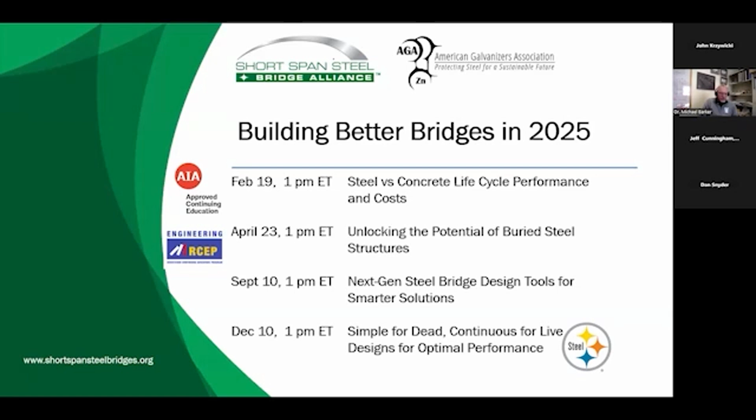Today we're going to talk about steel versus concrete, life cycle performance and costs, as part of Building Better Bridges in 2025. I'm Michael Barker at Wyoming and also the Director of Education for the Short Span Steel Bridge Alliance, which I do want to introduce to you.

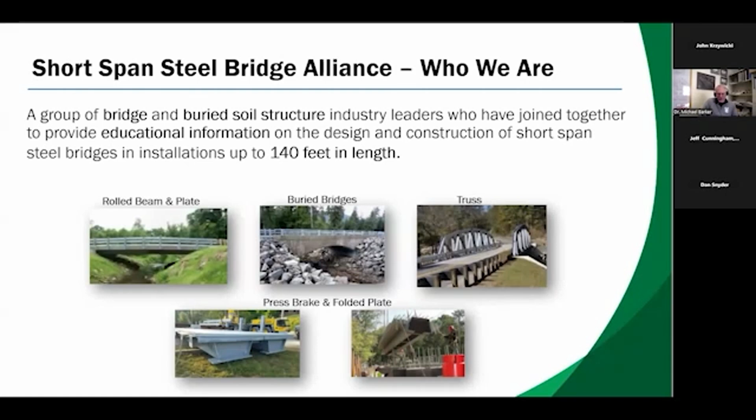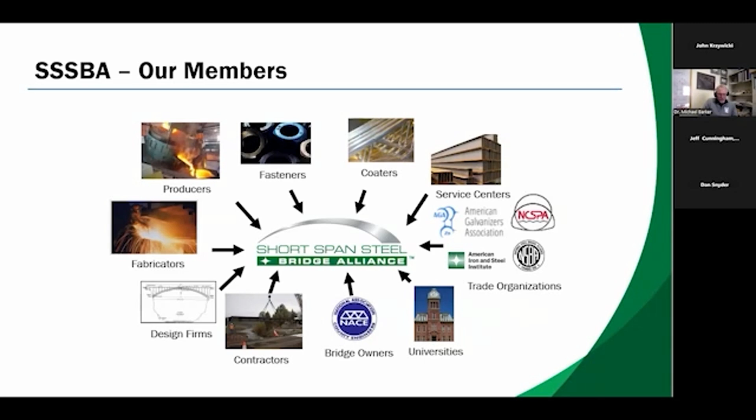The Short Span Steel Bridge Alliance is an industry support alliance, a group of bridge and buried soil structure industry leaders who have joined together to provide educational information on the design and construction of short span steel bridges. It was initiated in 2007 as part of the American Iron and Steel Institute, where the members are stakeholders in the steel bridge industry. The purpose of the alliance is to help owners and design engineers with designing and building short span steel bridges. This is a list of what we do.

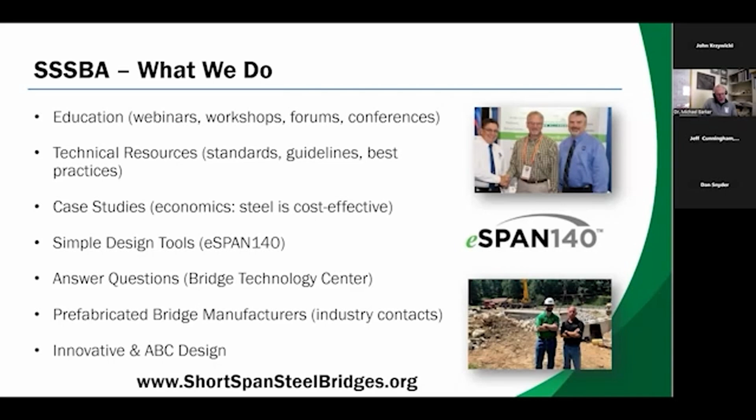The alliance is involved with all aspects of short span steel bridge design and construction, including outreach and education. An example of that is this collaboration with the AGA with the four presentations in the Building Better Bridges in 2025 series. We provide resources on all aspects of steel bridges, sample case studies, and a simple design tool called eSPAN140, which allows the user to get a design for a steel bridge in a matter of just minutes. And of course, a technology center for questions. We are also into innovative and accelerated bridge construction solutions and manufacturing firms that can deliver you a bridge. The website is there, and we certainly encourage you to visit it to see all that we offer.

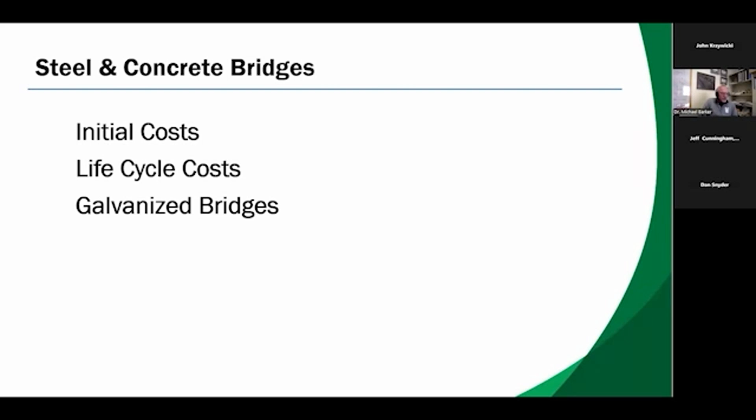For today's presentation, we're going to look at economy and life cycle costs of steel and concrete bridges. We're going to start with the initial costs and move into life cycle costs. This is an AGA presentation, so we're going to talk about life cycle costs of galvanized bridges right at the end. We start with the preconception that concrete bridges are less expensive than steel bridges in the short span market.

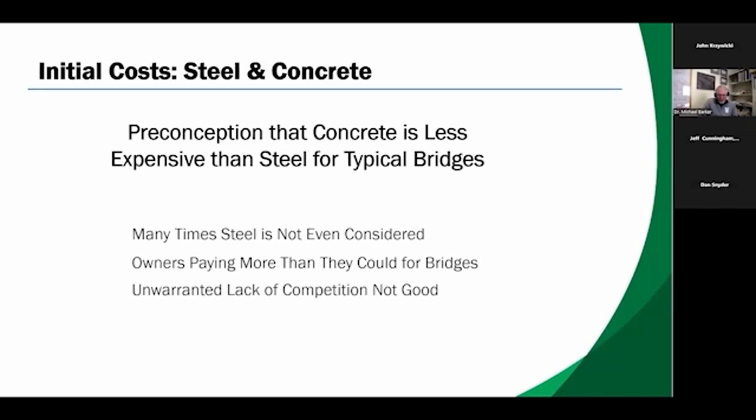Many owners and engineers believe this to be true, and many times steel is not even considered when there is a short span bridge need. This is unfortunate because that means owners may be paying more for their bridges than necessary. If owners and engineers would compete steel and concrete bridges, the cost for both would be lower due to the competition. In fact, studies show that states or regions that do not consider steel alternatives and only build concrete bridges pay more for those concrete bridges than states or regions that have healthy competition between the two bridge materials. Now we're going to look at case studies of county and state bridges for initial costs.

The first case study is kind of special to me because it's where the Short Span Steel Bridge Alliance started. It's from Audrain County, Missouri, and these are bridges that were built in 2012.

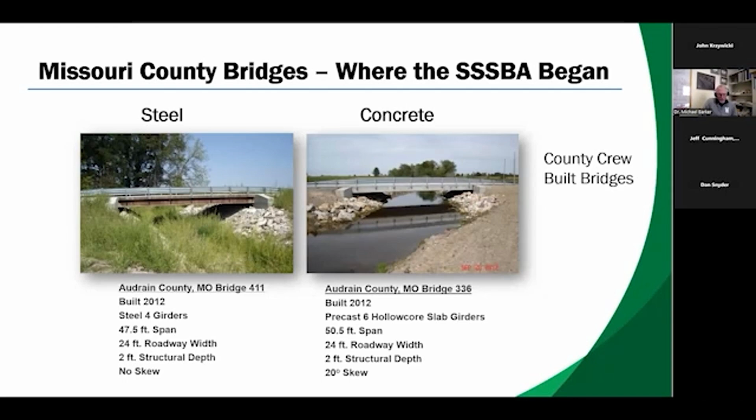This slide shows the total cost for the two bridges, where the costs are broken into material and labor, equipment, bridge rail, rock, and engineering.

We can see that for the total costs of these two bridges, the steel bridge has a 19% savings over the concrete bridge. The costs are calculated based on the square footage because of the slightly longer 3-foot length of the concrete bridge.

However, comparing only total costs can be deceiving given the different site characteristics of the two bridges. For instance, we see here that the concrete bridge had significantly higher engineering costs and lower rock costs.

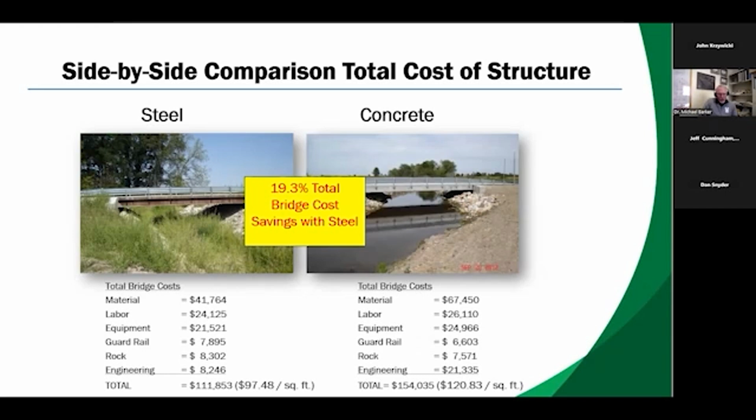So that same county engineer was also asked to separate out only the superstructure costs so that an equivalent direct comparison could be made for the two bridges.

These costs represent the costs associated with only the superstructure. So this is a true apples to apples comparison of the cost of this concrete and this steel bridge. Removed from the total cost is all site prep work and grading, engineering, rock, abutments, and so forth.

We can see the cost for the materials, labor, and equipment for only the superstructure. So if we look at the results, the steel bridge cost $37.54 per square foot and the concrete bridge was $50.61. The steel bridge is considerably less expensive for this comparison.

Now, one item to note is the equipment cost, where the steel bridge used a county-owned 30-ton crane. The concrete bridge girder members are heavy, and the county had to rent a 100-ton crane at a cost of $3,500. The other $500 for each in the equipment was a rented skid steer for incidental work.

However, even if the county needed to rent the 30-ton crane, that would have cost $1,520 at that time. That increases the steel bridge cost to only $38.88, still considerably less than the concrete bridge cost.

The steel girders are weathering steel that requires no painting, and these costs are already included in the cost of the steel girders. However, if the county needed additional corrosion protection and used, for instance, galvanizing, the cost would have been approximately 22 cents per pound of steel, and the steel bridge total cost would still be significantly less than the concrete bridge costs.

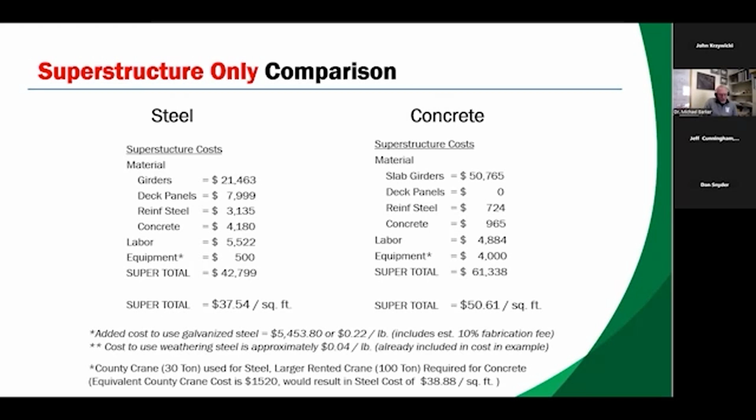So for these two bridges, as they were built, the superstructure-only costs show that the steel bridge option would have a savings of over 25% compared to the concrete bridge. That is 5 steel bridges for the cost of 4 concrete bridges.

This is for 2 almost identical bridges where they have the same structural depth, which means no difference in approaches, the same roadway width, the same bridge rail system, the same abutments, and the same county crew built both bridges.

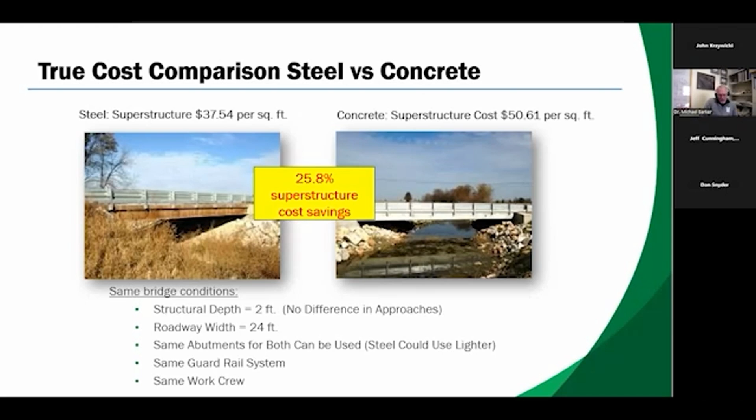Now, this demonstrates that steel is competitive with concrete. In fact, here it is economical. The preconception that concrete is always less expensive is incorrect. Steel short-span bridges can, and many times will be, less expensive than a concrete option.

But everybody says, okay, that was one example. Yes, that's true. The Alliance also worked with the county engineer on other bridges built near the same time frame. This table looks at the total constructed costs of an additional 5 steel and 4 concrete bridges built in Audrain County. At the bottom, we see that sometimes steel is less expensive and sometimes concrete is less expensive. This is healthy competitiveness and is good for the owner and the public.

These are examples of county bridges that show that both steel and concrete are competitive in the short span market, and both should be considered. Now, these examples were county-owned bridges. Next, we're going to look at a couple state bridges in Missouri.

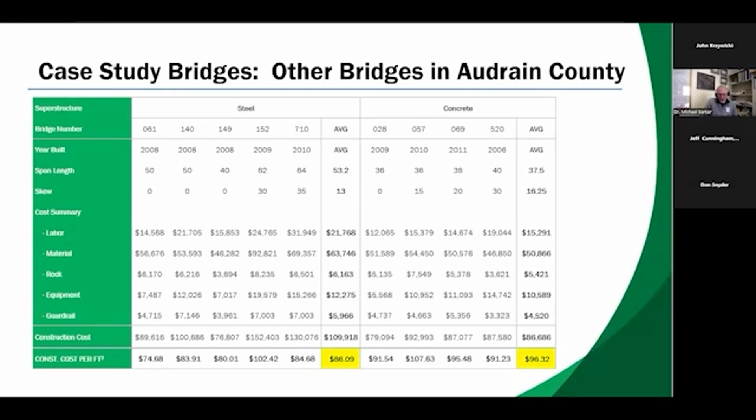Here are two nearly identical bridges, one steel and one concrete, that cross over the same highway near Columbia, Missouri. Both are two-span, with the steel bridge just a little longer and wider, so of course the total cost will be divided by the deck area for comparison. These were both design bid build projects with a contractor constructing the bridges.

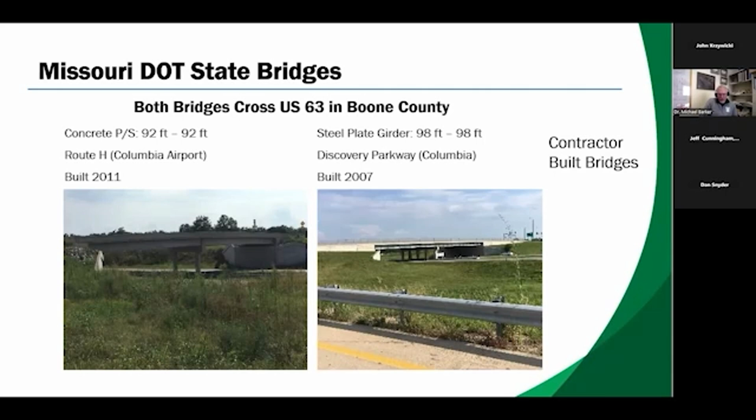Here are the costs for the two bridges, concrete on the left, steel on the right. Both had non-bridge items such as a conduit system, pedestrian fence, and an architectural facade, and these costs, in green, were removed from the total cost since they are not structural. At the bottom, we see the concrete bridge cost $77.71 per square foot, and the steel bridge cost $72.94.

However, there was a 4-year difference between when these two bridges were built. To account for the age difference and inflation, an Engineering News Record construction cost index of 2.7% per year was used to bring the cost of both bridges up to a common year of 2017. We see here that the steel bridge was less cost at $85.58 than the concrete bridge at $91.18.

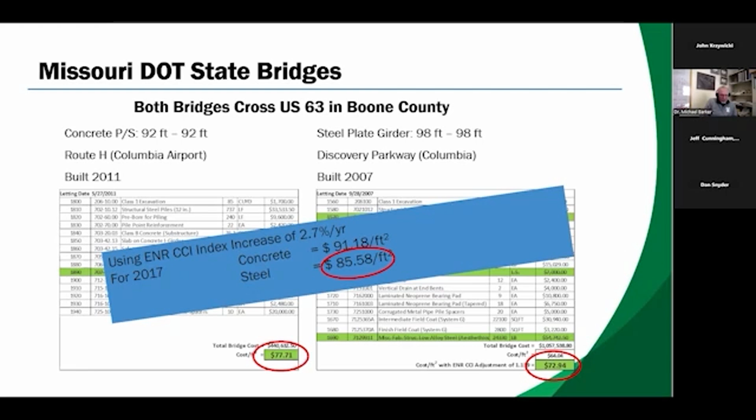The Alliance has so many more case studies on initial cost that you can find on the website, where the Alliance has looked at county and state bridges, bids and actual costs, case studies of county bridges.

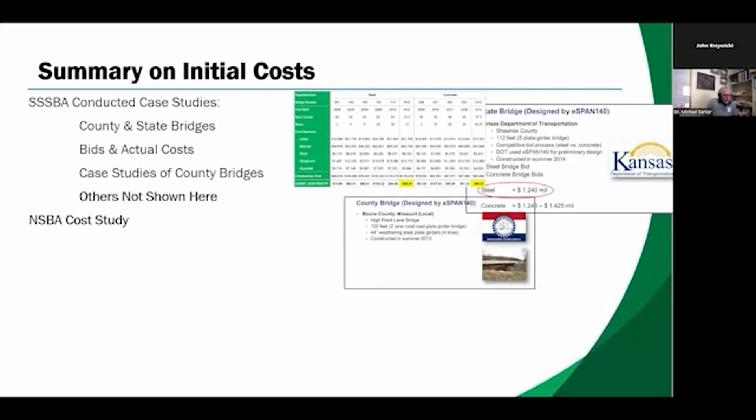After the study was done, the authors offered this quote in the report: 'These conclusions come as a surprise to the authors, who assumed that concrete bridges would be more cost competitive than steel bridges.'

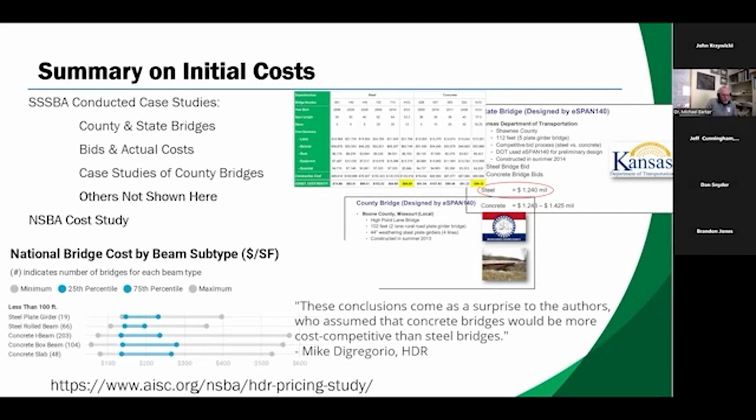So what these studies show, and the NSBA study shows, is that the preconception, which is pretty prevalent across certain regions of our nation, is a misconception. Steel and concrete bridges are competitive.

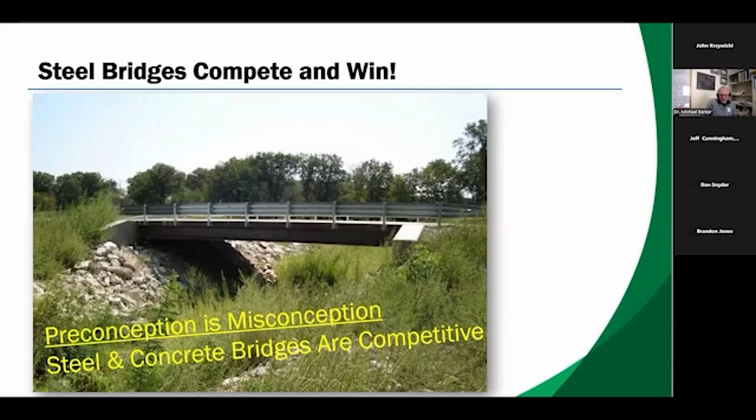But first cost is just that, the cost of putting the bridge in place. Responsible owners are also concerned about future maintenance costs and service life. The question about life cycle costs routinely comes up. What's actually asked is which type of bridge is best for life cycle costs?

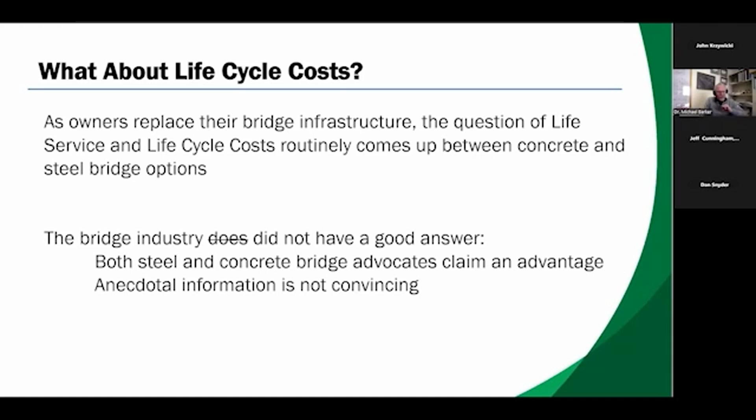Both the steel and concrete industries have offered anecdotal evidence, but did not, until now, have good evidence on which bridge type is best. So a study was conducted that examines the historical life service, meaning performance and maintenance, and agency life cycle costs, meaning the true cost for building and maintaining the bridge over its life, of steel and concrete bridges in Pennsylvania. A historical study was conducted so that the results show what actually happened to the bridges instead of anecdotal guesswork from the steel and concrete industries.

The Pennsylvania DOT had good records on their bridges and offered PennDOT data for the study, and we thank them.

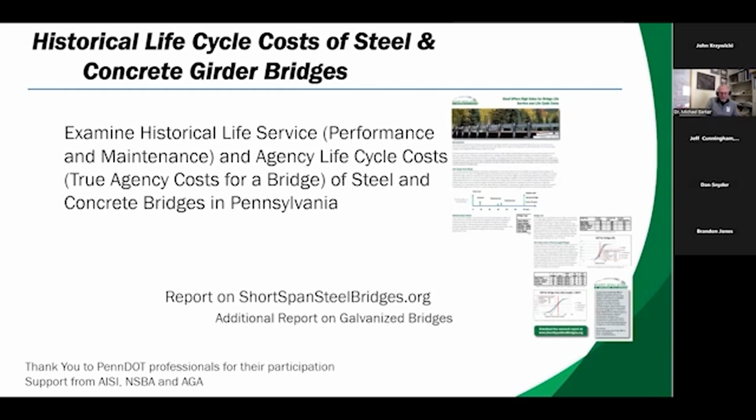To determine a life cycle cost for a bridge, one needs to know the full history of that bridge. This includes the initial cost, the year it was built, and all maintenance that occurred over its life, including department and contractor maintenance, and the lifespan for the bridge or when it will be replaced. Of course, all the bridges in the PennDOT database were still in service, so an end-of-life model was needed to estimate the life of the bridge.

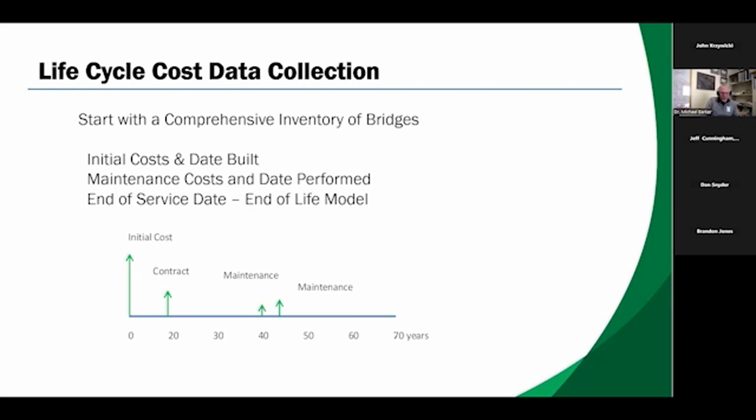The study's objective was to compare life cycle costs of typical concrete and steel bridges, so there were criteria each bridge had to meet to be included. The criteria included considering only typical steel and concrete bridges, selected as precast I-beam, precast box with boxes adjacent to each other, precast boxes spaced apart, steel rolled beam, and steel plate girder bridges. In addition, since precast concrete became a mainstream construction method and modern steel design and detailing started around 1960, bridges built after 1960 were considered.

Each bridge used in the database had to have complete records for initial costs and date built, and accurate dates and costs for any type of department or contractor maintenance.

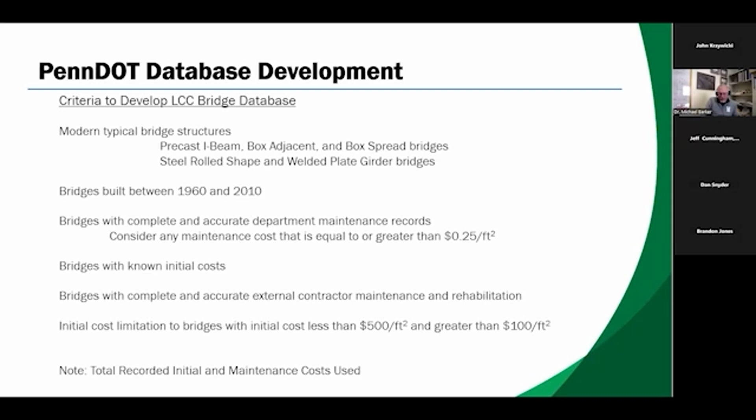Since the study was looking for typical bridges, it removed any bridges that had exceedingly high or low initial costs, and all costs were based on PennDOT recorded costs. PennDOT has over 25,000 bridges in their database. Of those, almost 8,500 are of the 5 types considered in the study, and of those 8,500, over 6,500 were built between 1960 and 2010 for a potential study database.

When the 6,587 bridges were subject to the criteria, many did not have accurate and complete life history information, which left a database of a little over 1,700 for the life cycle cost study. This is over 25% of the potential bridges represented, which is pretty good representation.

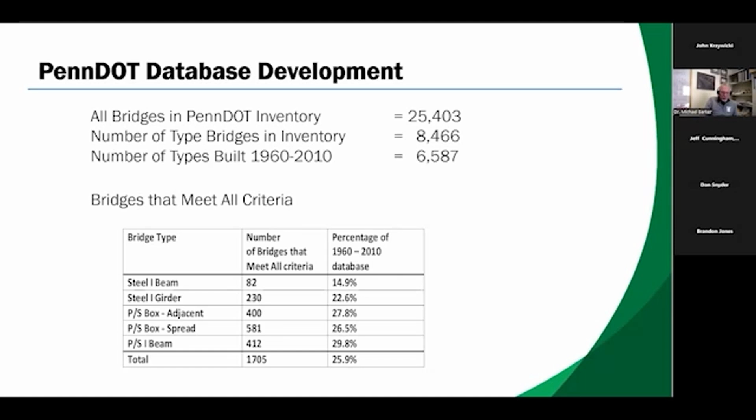All of the 1,700 bridges are still in service, so a bridge life model needed to be developed to predict when the bridge would be taken out of service or replaced. The model is based on the inspection superstructure condition rating, which varies between 0 and 9, where 9 is a perfect bridge. It was assumed that the bridge had a rating of 9 when it was built.

A deterioration rate was determined based on the condition rating in the year 2014 by the change in rating divided by the years. With the deterioration rate, the remaining life could be estimated by assuming the bridge would be replaced when the superstructure condition rating became a 3. The bridge life is the sum of the remaining life added to the current age.

This table shows the first results from the life cycle cost study. It shows the average deterioration rates for the 5 types of bridges, not only for the 1,700 bridges, but for the over 6,500 potential bridges.

For this presentation, when these results tables are shown, there will be 2 aspects mentioned. First, the top 2 best performing bridge types will be highlighted. For instance, steel rolled beam bridges have the lowest deterioration rate at 7.1% of a condition rating per year, and precast spread box bridges are second with an 8% deterioration rate.

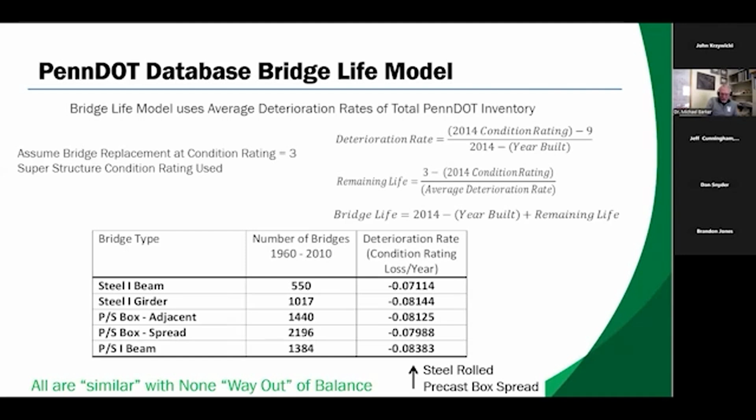The second aspect is the statement at the bottom in green that all are similar with none way out of balance. The results show that the deterioration rates for the 5 types of bridges are not far off from each other. No one type greatly outperforms the others, nor is any significantly worse. We're going to address this statement, all are similar with none way out of balance, towards the end of this presentation.

So now let's do an example. We'll look at the life cycle analysis of an example bridge to demonstrate the work of the study. The bridge is a precast spread box bridge built in 1969 with 3 spans and a deck area of about 7,600 square feet. In 2014, the base year of the study, the superstructure condition rating was a 5.

Knowing that the average deterioration rate for spread box bridges is 8%, the estimated remaining life when the condition rating reaches a 3 is 25 years. Given the bridge is 45 years old now, the predicted lifespan for the bridge is 70 years.

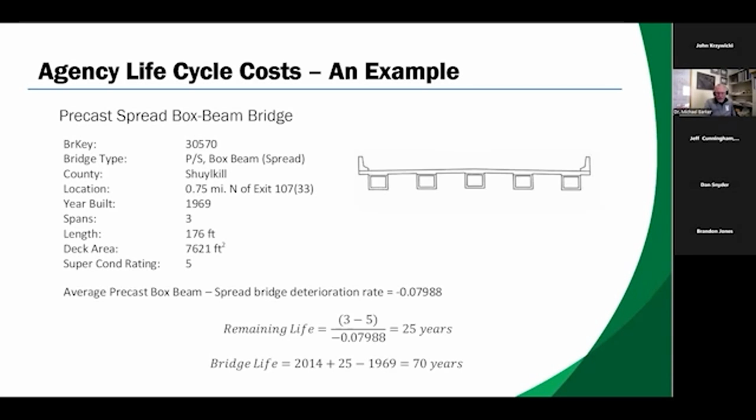To compare life cycle costs over the database, inflation has to be taken into consideration. So all of the bridges were assumed to be built in 2014, and all of the costs inflated by the Engineering News Record construction cost indices, like we saw from that earlier case study. For this bridge in 2014 dollars, it costs $143.45 per square foot, and the maintenance costs in 2014 dollars occurred at years 19, 40, and 44.

The study used constant 2014 dollars for all future costs, since the discount rate that we're going to use considers inflation for the future.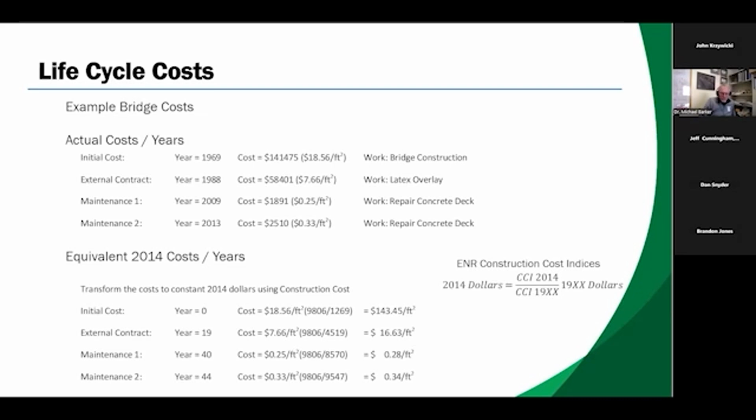Now the life cycle of that bridge can be developed with dates and costs in constant 2014 dollars, using a discount rate from the Federal Office of Management and Budget of 2.3%, which takes into consideration inflation of the future 2014 dollar costs. A present value cost of the bridge's life cycle can be determined to be $154.49 per square foot by discounting those future costs back to the year 2014.

This means that, more or less, if $154.49 per square foot was put away when the bridge was built, that amount could pay the initial costs and all future costs for that bridge cycle. However, we cannot compare the present value costs of a bridge that lasts 70 years to a bridge that lasts only 40 years. The outcomes are not equal.

So a way to compare different lifespan bridges is to use perpetual present value costs, also called capitalized costs, by assuming the bridge is replaced after each cycle in perpetuity. For this bridge, the capitalized costs come out to be $193.97 per square foot, which means, again, that if that amount was put away today, it could pay for the first cycle of the bridge and replacement of that bridge every 70 years forever. But the important thing is, with capitalized costs, we can now compare all of the bridges in the database directly.

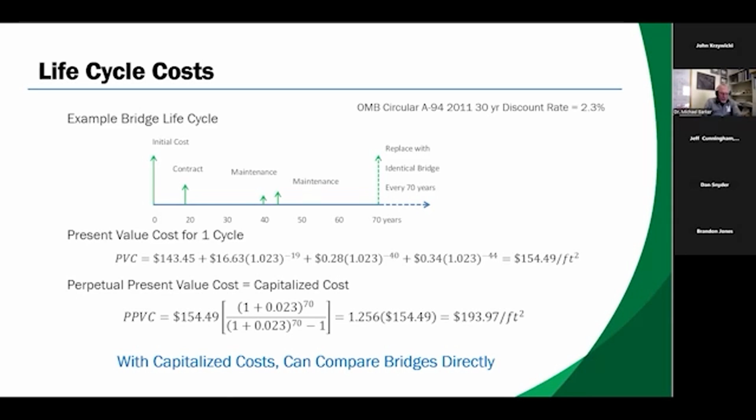So, this is busy and small, but a bridge database was organized by bridge type in 3 Excel worksheets for each type. The first worksheet was the bridge information with location, year built, number of spans, bridge length, deck area, geometry, and bridge materials. The second was the department and external contractor maintenance performed on the bridge. And the third was the initial and life cycle cost results.

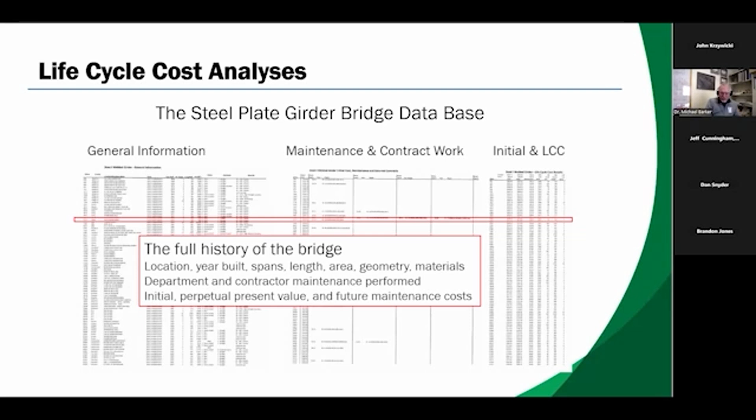Studies and a final report were produced from the database of bridges. The report considered bridge life and capitalized costs, where the capitalized costs were studied for several variables as shown here. Now for this presentation, we're only going to look at bridge life, capitalized costs for the entire database, and capitalized costs for short length bridges as shown in blue. But the full detailed report can be found at shortspansteelbridges.org.

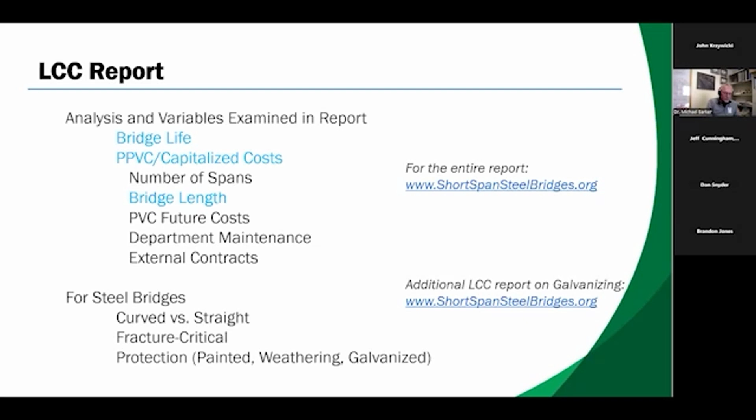And right after this study was completed, there was another study that looked at life cycle costs of galvanized bridges. That report can also be found on the website, and I will talk about that towards the end of this presentation.

For bridge life, the database of the 5 types of bridges shows that the rolled beam bridges have the longest predicted life of over 81 years, and second was the precast spread box bridges at just under 80 years. However, as you see, none of the bridge systems varied much from the others, with a 7-year spread, and at the bottom is the statement that all are similar with none way out of balance.

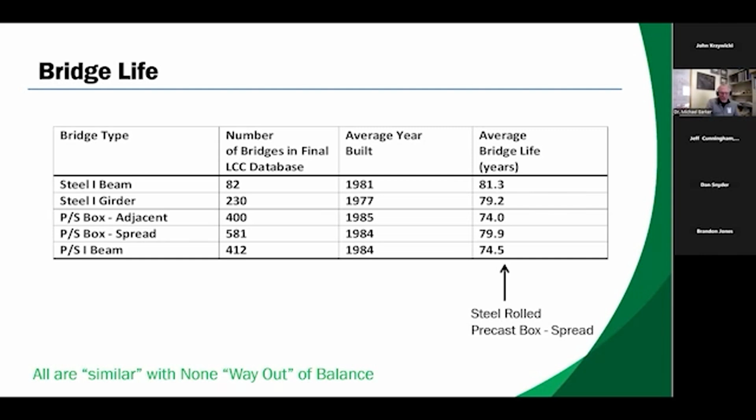A good way to look at predicted life that considers not only the average life, but also the standard deviation of the life is a statistical cumulative density function, or CDF. Now here it is assumed that the data is normally distributed, and that may or may not be true. But with the CDF, the question can be asked, what is the probability that a given type of bridge will last at least 75 years, which is the expectation for modern bridge construction?

The results here show that there is a 73% chance that a rolled beam bridge will last at least 75 years, and a 65.6% chance that a precast spread box bridge will. However, this also shows, according to the data from this PennDOT database, there's only a 44.3% chance that a precast I-beam bridge will last 75 years or more. A result that I really didn't expect.

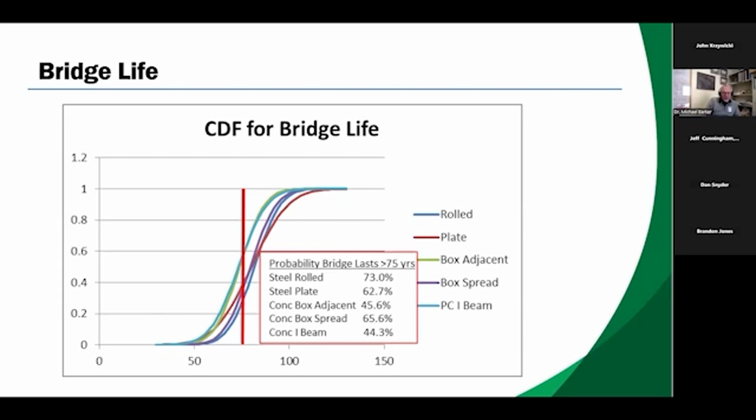Okay, now let's talk about those capitalized costs. This table shows the results for capitalized costs for all the bridges in the database. Here we see that the precast I-beam bridge has the lowest capitalized costs, and the steel rolled beam is second. The table also shows the initial costs, present value costs of future maintenance, average length, average number of spans, average year built, and average life.

And this is where we need to be careful with comparisons. Directly comparing all of the bridges without considering the differences in these variables can lead to misleading results. For instance, plate girder bridges in the database have an average of over 4 spans per bridge, whereas adjacent box precast bridges average just over 1 span per bridge. Number of spans, along with average length of the bridge, has a significant impact on costs.

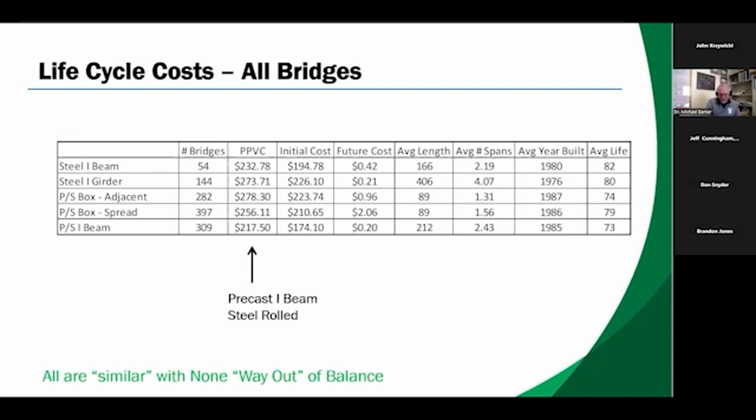And in a couple slides, we will examine a more consistent set of bridges based on span length for a more consistent comparison. And of course, the full report examines these different variables in depth.

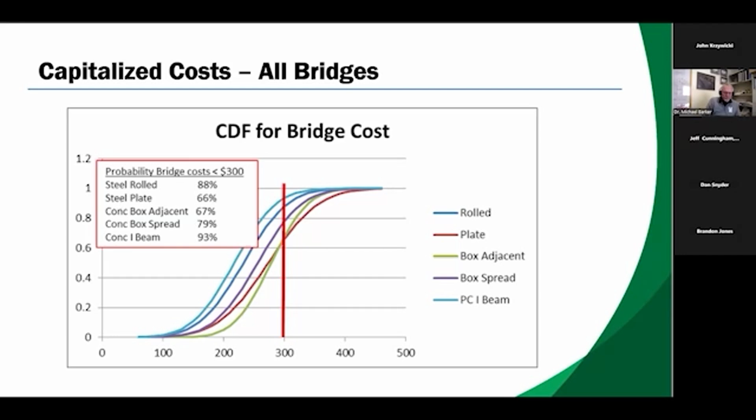Now, we are the Short Span Steel Bridge Alliance, and we define short spans as simple spans 140 feet or less. This table reduces that full database of bridges to only bridges with lengths of 140 feet or less. It does not restrict it to simple spans, only by length. As we can see here, there is much more consistency in the average length and the average number of spans, which makes a better comparison than the full database results.

The results show that steel rolled beam bridges have the lowest capitalized costs at $266.24 per square foot, with precast spread box bridges at $272.20. However, at the bottom, there's still that statement that all are similar with none way out of balance. None are really far away from the others, except maybe the plate girders are a little bit high, but that would be expected in these short spans since they are not as economical below about 80 feet.

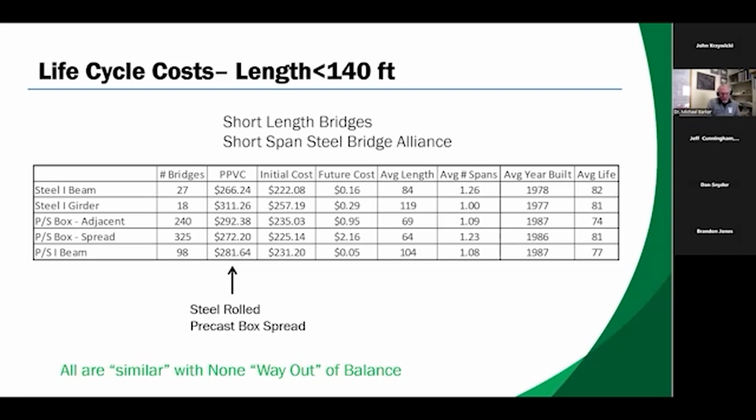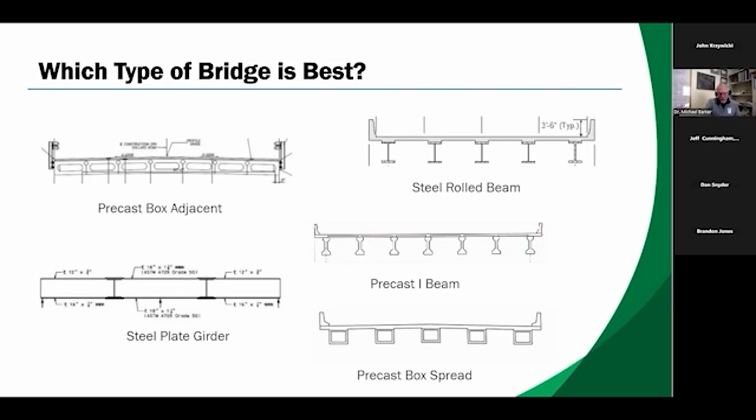So now we're coming back to that original question that we get from owners: which type of bridge is best for life cycle costs? Is it the precast box where the boxes are adjacent? Is it a steel plate girder? Precast boxes where the boxes are spread? Precast I-beam? Or steel rolled beam bridges? And this is where we come back to that statement that all are similar with none way out of balance.

The overall weighted average capitalized cost for all 5 types of bridges is $252.40, showing up there towards the top. Each bridge type average is within 14% of that weighted average.

Okay, now let's look at the dispersion. If we look at the standard deviation ranges within the 5 different types, they range between $48 and $65 per square foot. That doesn't help us, but if we turn that into a coefficient of variation, it comes out to between 20 and 25%. So all of the bridges are within 14%, and their coefficients of variation are significantly more than 14%. What that means is that any one type of bridge may be most economical for a given bridge project. There is no one type of bridge that clearly beats the others.

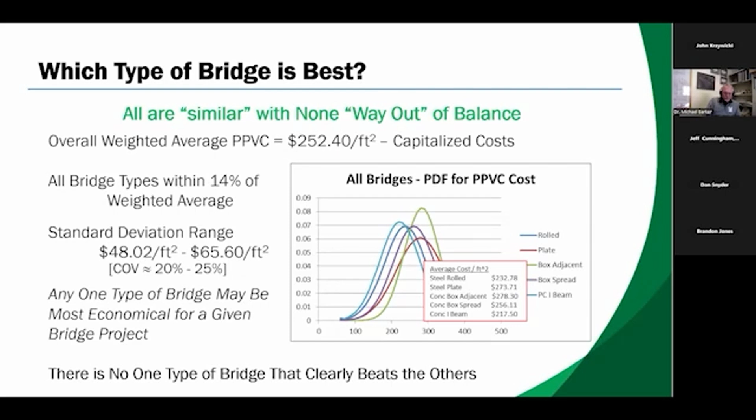So the conclusions of the life cycle cost study are: typical concrete and steel bridges are competitive on initial costs, future costs, life cycle costs, and bridge life. Yeah, I know that's not what you expected since this is a steel bridge presentation, but I'm a bridge design engineer before I'm a steel bridge design engineer, and this is good news. For any given bridge project, concrete or steel bridge types may be the most economical. Again, that preconception that concrete is always less expensive is a misconception. Owners should consider both steel and concrete alternatives for individual bridge projects.

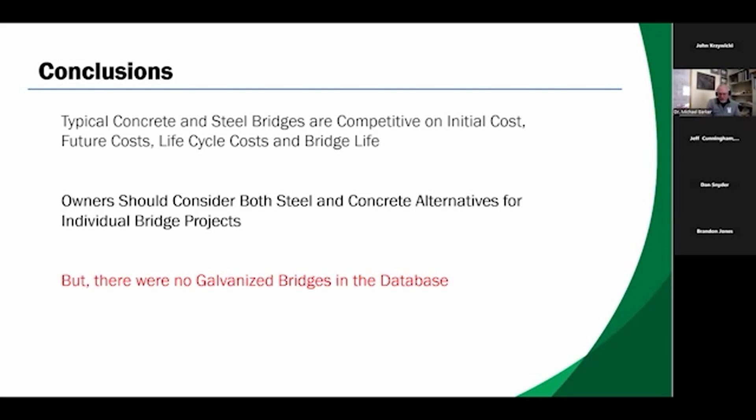And here in red, you see I say there were no galvanized bridges in the database. And that question came up. It really came up because of the hurricanes in Puerto Rico and some of our bridge manufacturers helping Puerto Rico replace some of their bridges after that hurricane, because Puerto Rico was concerned about corrosion.

Steel girder protection systems include painting, of course, that we're very familiar with, weathering steel, which is very common, metallizing, which is not as common but is becoming more economical and more common, and of course, galvanizing. Galvanizing has become an economical and effective protection system. The initial costs are about equal to, or sometimes, depending on the region, even less than quality 3-coat paint systems. Galvanizing can significantly increase the life of a steel bridge. And of course, with galvanizing in the right conditions, there is near zero future maintenance.

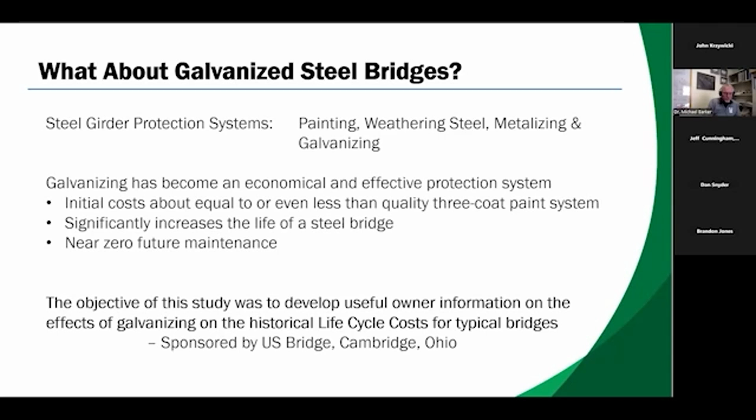So another study was conducted using the same bridge database to develop useful owner information on the effects of galvanizing on the historical life cycle costs for typical bridges. This was sponsored by US Bridge, which was doing work down in Puerto Rico.

So what we did was we took the painted steel bridges in the current database, which had painted and weathering, and we modified them by assuming the steel had been galvanized instead of painted when it was built. We needed to make some assumptions, and the assumption we made is that galvanizing adds 25 years to each bridge life.

Galvanizing costs are the same as a quality paint system, therefore bridge initial costs do not change. Future painting costs are removed from the maintenance record when it's galvanized. Corrosion repairs to the girders are removed from the maintenance record. However, other types of maintenance like concrete deck and joint repairs and other maintenance work remain in the maintenance record.

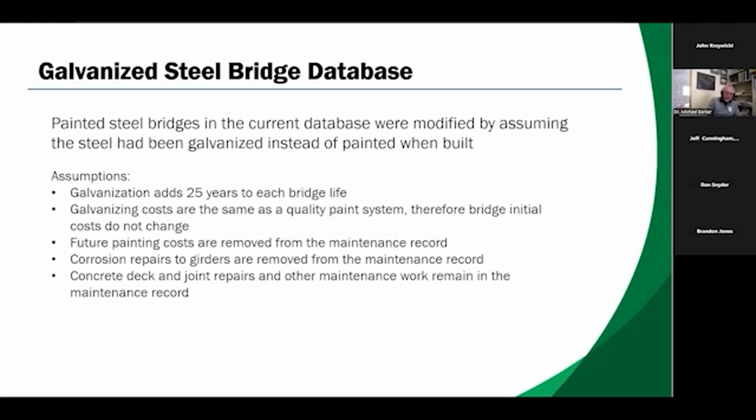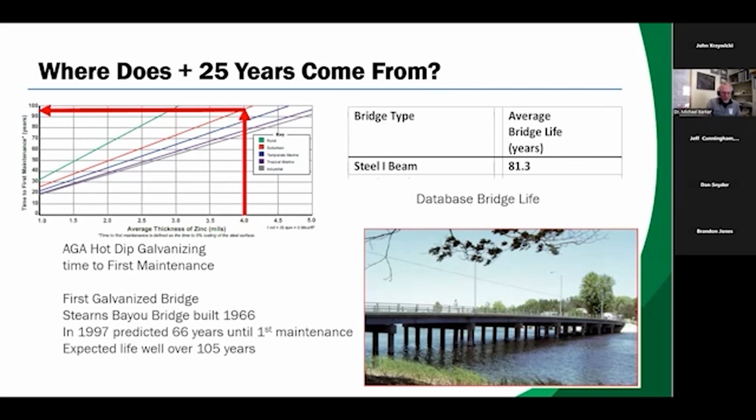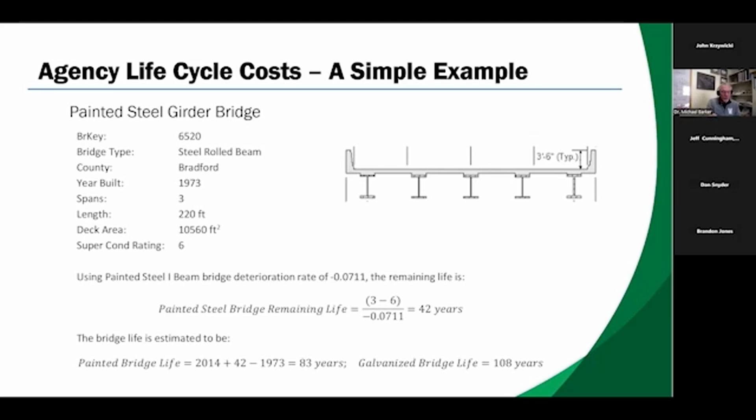Using a painted steel I-beam bridge deterioration rate of 7.1%, we can predict the remaining life, going from a condition rating of 6 down to 3, which is 42 years. The bridge is 41 years old, so that gives an expected life for the painted bridge of 83 years. With what we think are rational assumptions, if that bridge had been galvanized, it would last 108 years. Then we lay out the life cycles for those bridges.

On the left is the painted bridge, where there is the initial cost, and in year 36 or so, that bridge had to be repainted. That came up with a present value cost for one cycle of the painted bridge of $140.05 per square foot, and the present value of that future maintenance came out to $18.64.

On the right is the galvanized bridge. We assume there is no repainting required, and that it lasts 108 years, giving a present value cost of $121.41. Since one lasts 83 years and one lasts 108, we needed to get those capitalized costs.

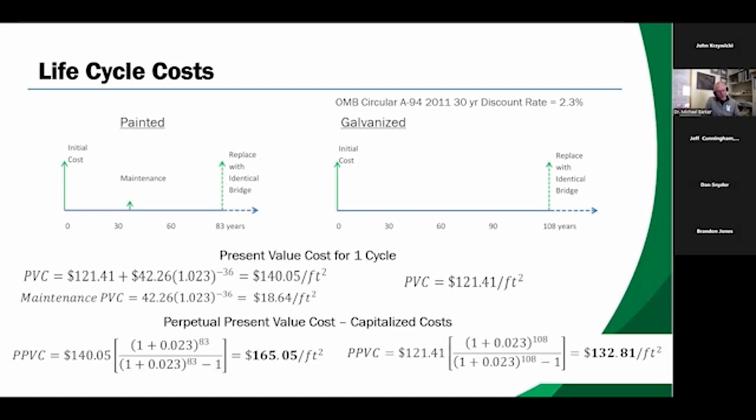So replacing with identical bridges, the perpetual present value cost, or capitalized cost, of the painted bridge comes out to $165.05, and for the galvanized bridge it comes out to $132.81. We can see, because of the removal of future maintenance and the expected extension of life, those capitalized costs go down significantly.

So here's a table that shows this for all the applicable steel bridges, rolled beam and plate girder, where we started with the painted bridges—172 of them, shown on the top left. If we looked at the average of all those capitalized costs, it comes out to $264.82. If we redid those with a 25-year extended life, it goes down to $242.31.

Now, there were some weathering steel bridges in the database, and I wanted to do a good comparison with weathering too, but I had a little issue. Weathering and galvanized are very close, but there are not many weathering steel bridges in the database—only 26—and some of those are more complicated. So I did not feel comfortable making a direct comparison between galvanized and weathering.

But between galvanized and painting, we can see there's a significant decrease in capitalized costs. If we go over to the future costs, we can see future costs are cut in about half. And if we go over to the average life, of course, it should be 25 years more for the galvanized.

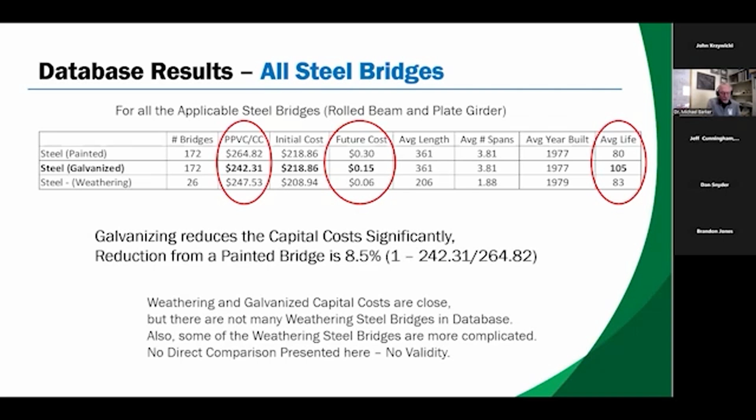So for the shorter length bridges, now we're only looking at 18 of them. These are the 140 foot bridges, which is what the Short Span Steel Bridge Alliance deals with. The painted option comes out to 277.34. The steel I-beam, when we galvanize it and add the 25 years, drops down to 254.46. Again, the present value of the future costs is less than half, and the average life goes up by 25 years.

But if we compare them to the concrete bridges, compared to painted bridges, galvanized bridges have a lower capitalized cost than the best concrete option, which is the precast box spread. We also see that the future costs are reduced, and the average life of galvanized bridges is more or less 25 years more.

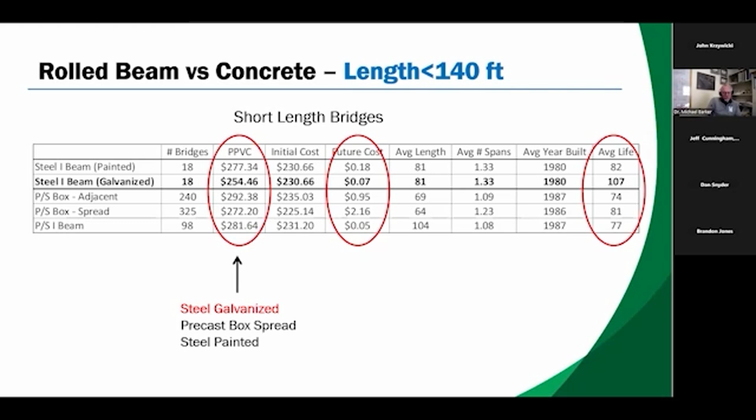So, conclusions: galvanized bridges have significantly lower capitalized costs and last 25 years longer compared to painted steel bridges. Here's an important statement, using rational assumptions: for all painted bridges, galvanizing reduces capitalized costs 8.1% and 8.6% for rolled and plate girders, respectively. For painted bridges with that maximum length of 140 feet, those numbers come out to be 8.2% and 9%.

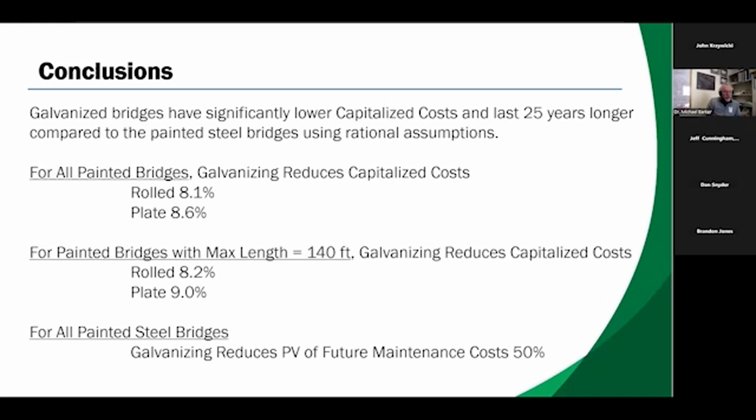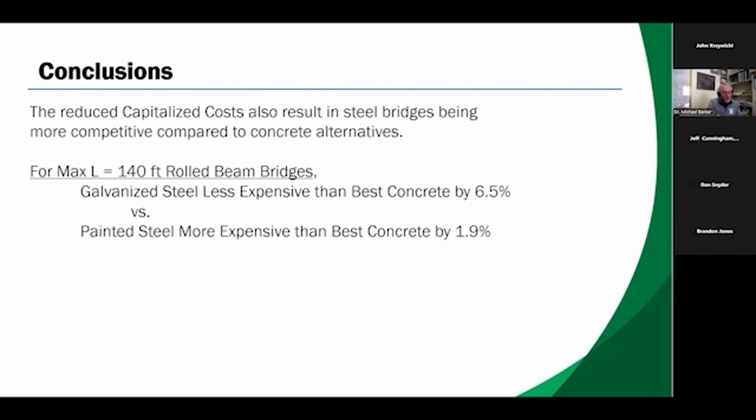And for all the painted steel bridges, galvanizing reduces the present value of future maintenance costs—which really is the repainting or repair of corroded out girders—by 50%. And just one more: the reduced capitalized costs also result in steel bridges being more competitive compared to concrete alternatives. For those maximum length 140-foot rolled beam bridges, the galvanized steel is less expensive than the best concrete by 6.5%, whereas painted bridges are actually more expensive than the best concrete by just under 2%.

So let's summarize. Typical steel and concrete bridges are competitive on first cost. Typical steel and concrete bridges are competitive on life cycle costs. Looking at galvanizing with the rational assumptions we applied, galvanizing is economical for first costs, extends the life of steel bridges, reduces future maintenance costs, and can lower agency life cycle costs. And the big conclusion I want you to take away is that for a 60-foot span, owners should consider both steel and concrete alternatives for individual bridge projects.